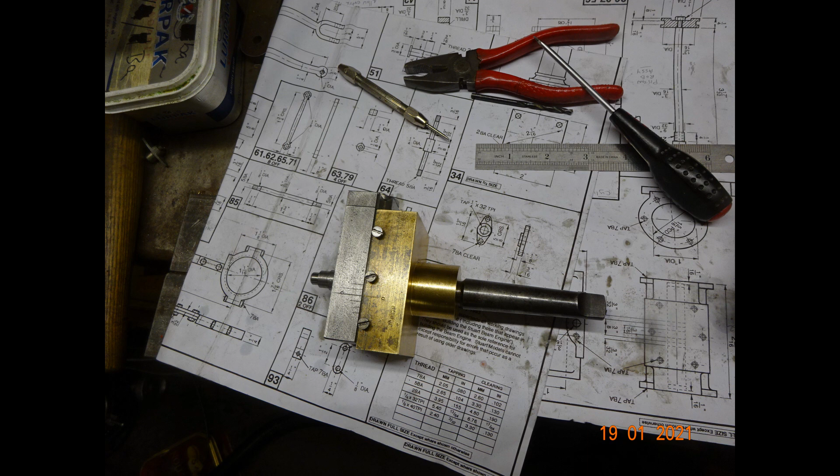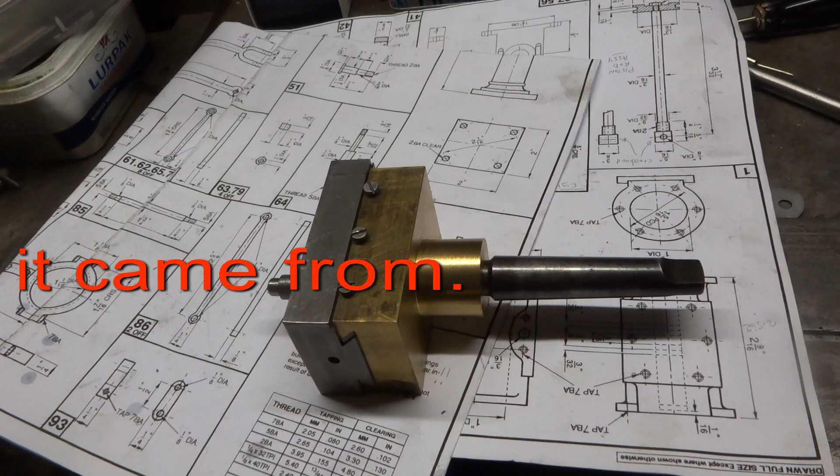I made this years ago and the component parts are quite simple. The 2 Morse taper to fit the Myford - you could turn that up using the cross slide, but actually looking at it, I've recovered this taper part from a presumably defunct tailstock drill chuck or something. It's clearly a bought part.

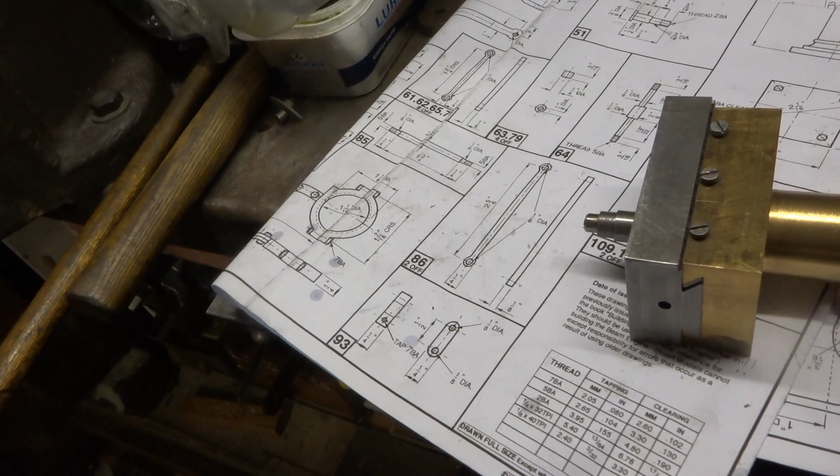This body is either brass or gunmetal, but it doesn't need to be - steel would do as well. I found an appropriate piece in my box of junk, I don't know what it is, brass, bronze, who can say, out of which to make that, but it would be as easy to make out of steel, probably a lot cheaper if you had to buy it.

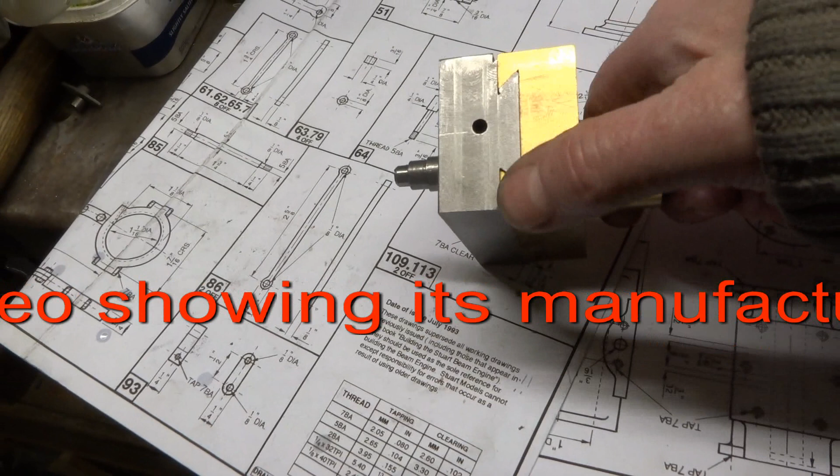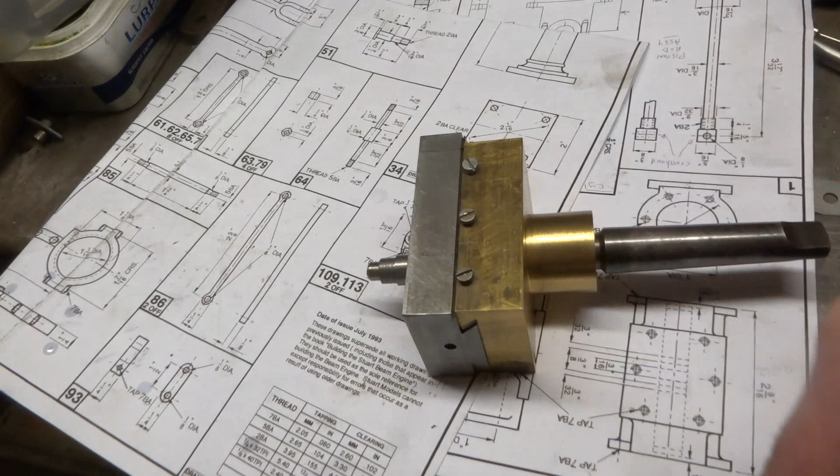I've got dovetails in the end of that, which you can see, and then machined up a steel block to slide in that dovetail, and there's a gib strip in there as well, which is tightened with these screws. When I set the thing over, I tighten these screws down, which has the effect of locking the slide in whatever position I've decided I need.

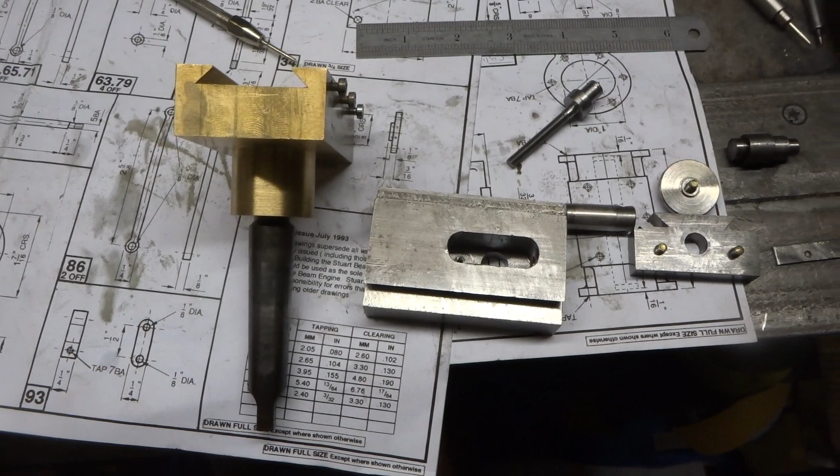Because I can't remember and can't find the article and drawings from which I made this offset tailstock adjuster, or whatever you call it, I thought I'd take it apart and show the constituent parts. I rather wish I hadn't, because it took me nearly an hour to do, since I couldn't remember how to take it apart either, but never mind.

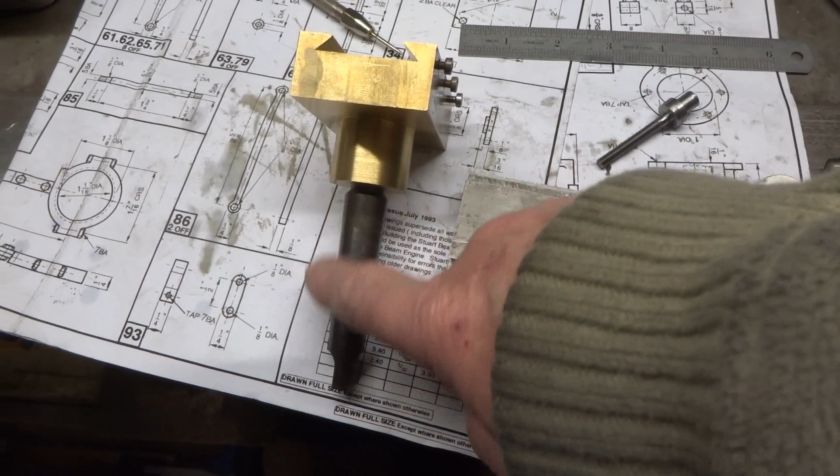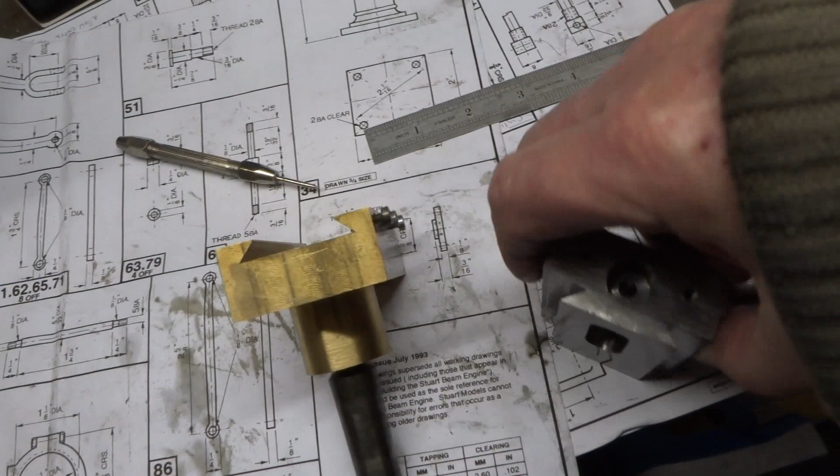The main body consists of a 2 Morse taper arbor to go in the tailstock of the ML7 Super 7. I've used a dovetail cutter to cut these ways, into which I've also machined and cut the adjuster itself, I suppose that's what you call it, so that one goes into the other.

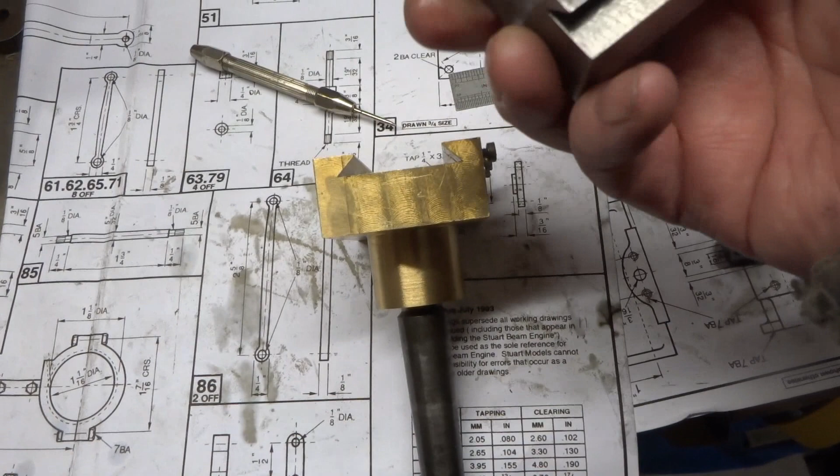The gib strip's not in at the moment, it's here, so hence a bit of play, but the one slides in the other. All homemade, that's out of a block of steel. I don't know that any of the dimensions are particularly critical.

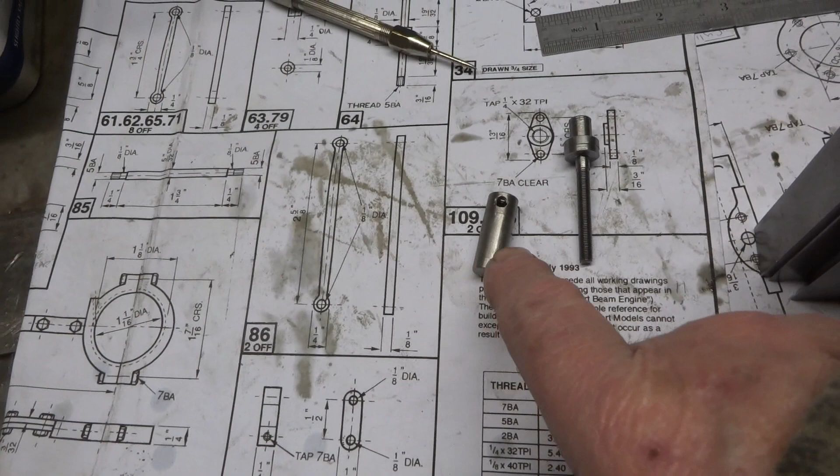The adjusting screw is threaded 3/16 by 40, and that fits into this bit of 7/16 steel block, and I'll just show how that works.

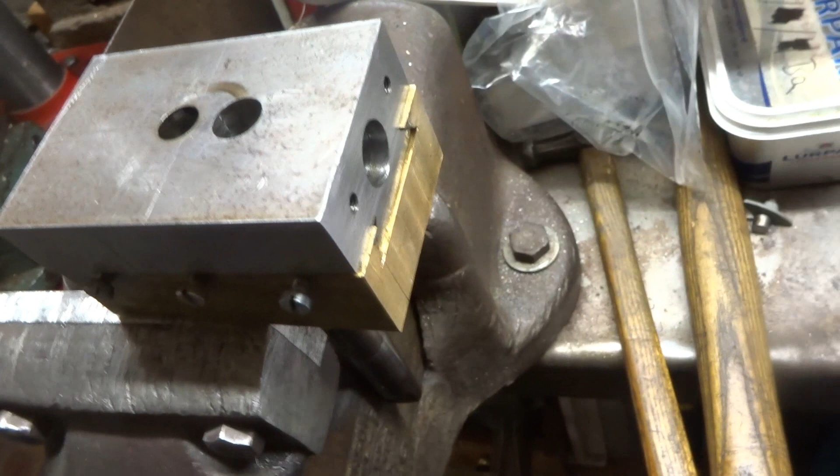There is a slot machined in the top slide part of this device, which fits over this. You can't do it at the moment because that's in there, but that slides along and fits over it, and then that slides and is held captive by this lock, something like that. There you go.

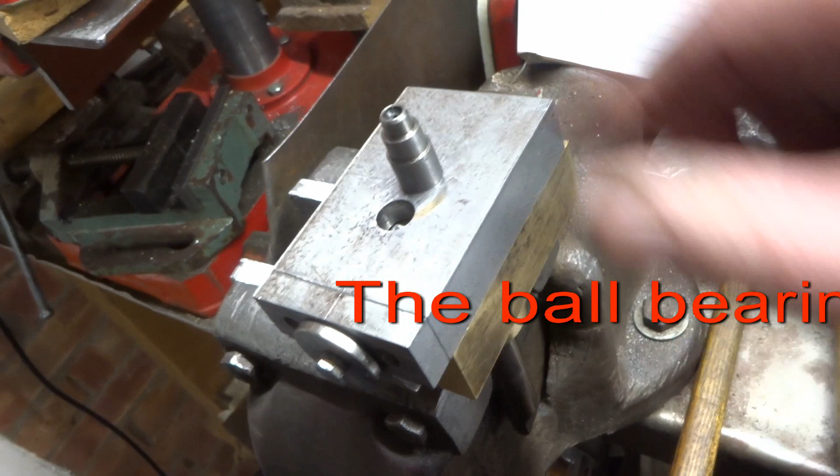The final part is to just drop the 3/8 peg in the end, which is quite a decent fit. That could be Loctited in really, and that's the part that holds the ball bearing, which I use to support the end of the centre.

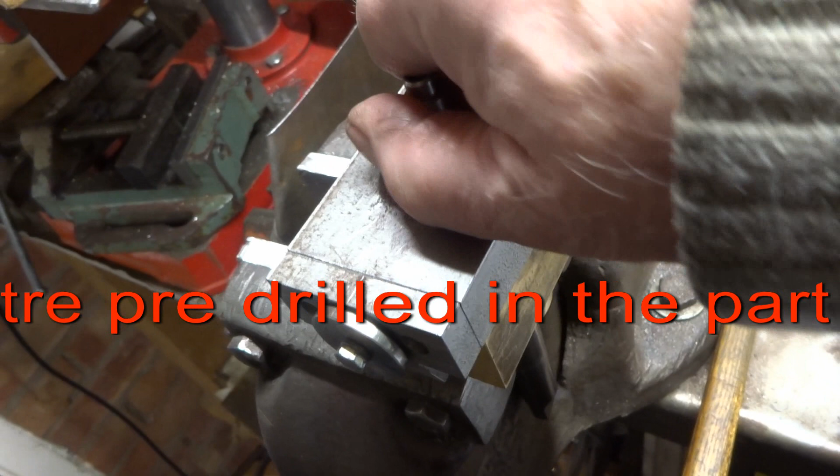Actually, it's become a bit loose. I think I might just put a bit of thread lock on that. There it is then - a bit of, not set yet, a bit of thread lock on that, to stop it wobbling about. Might Loctite it actually, because this doesn't actually need to be removed really.

But all assembled, this adjustment wheel doesn't really work - it should have been knurled, I can't get a grip on it.

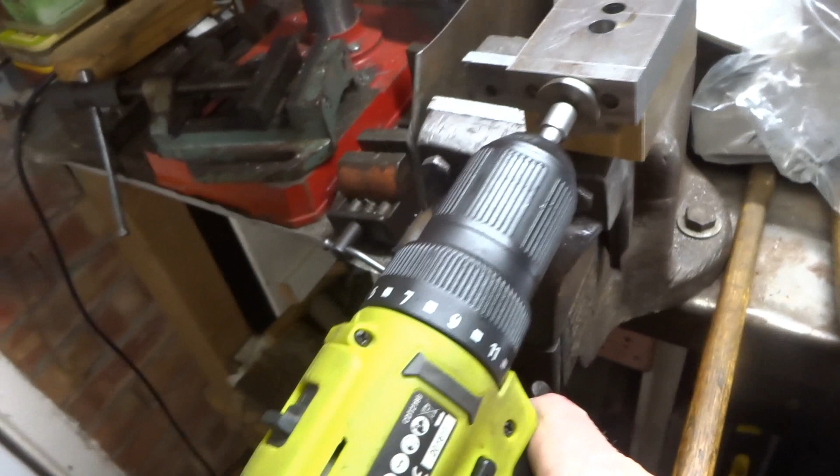But what I mostly do actually is - what size is this, 7mm socket - and I just use that to wind it in and out as far as I need to. Seems to work well enough.

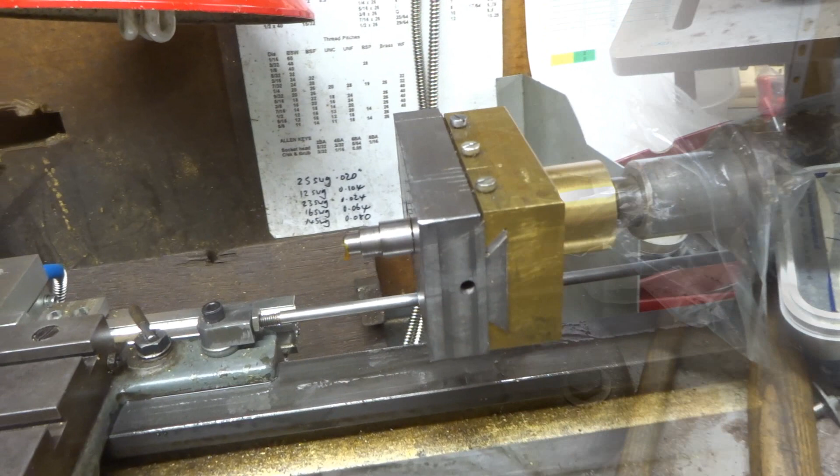The way this works, of course, is that you simply adjust this to create an offset so that the work won't be parallel to the bed anymore. There's an adjusting screw around the back here somewhere. I'll take it off the lathe in a minute to show you how you do that, and I put a couple of graduation marks on here just for reference. So you adjust it across by whatever mechanism to find whatever taper it is you think you're playing with.

And I've got a variety of different size ball bearings, which with a dab of grease - just put a ball bearing in this end so it doesn't fall out. It really is the only function of the grease while you set things up in order to run the part.

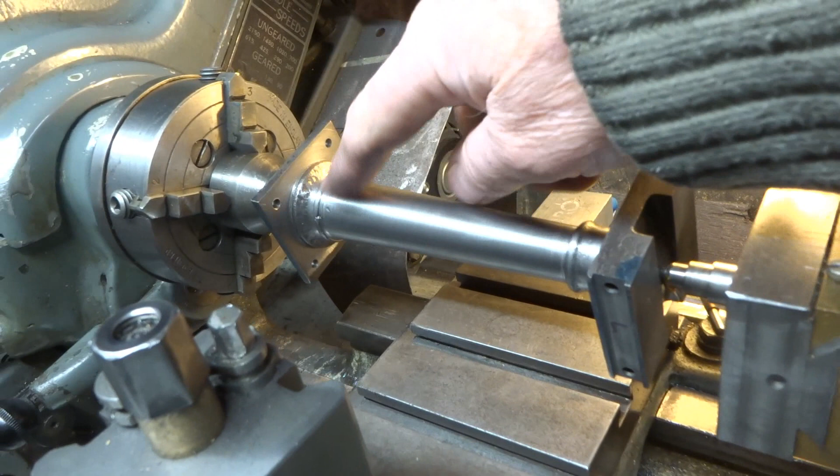So in this case I've been turning a taper on this column, and obviously you need some sort of driving dog arrangement, which I'll show separately. The ball bearing is just running in the centre at this end so that you can turn, and that works very well.

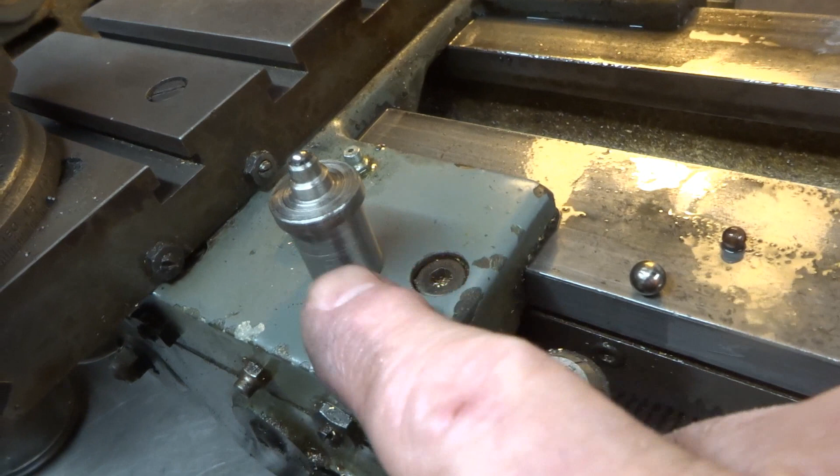If I had the 3-jaw fitted to this end, I also made this little thing here, so that is turned true and fits in the 3-jaw, and creates a ball bearing between centres at the other end, and I have used that occasionally.

Just for the moment I couldn't be bothered to take the 4-jaw off, and decided it would be easier to dial it in and do it that way.

And does it work? Well, I'm feeding in 0.002 at a time, and yeah, seems to be alright.